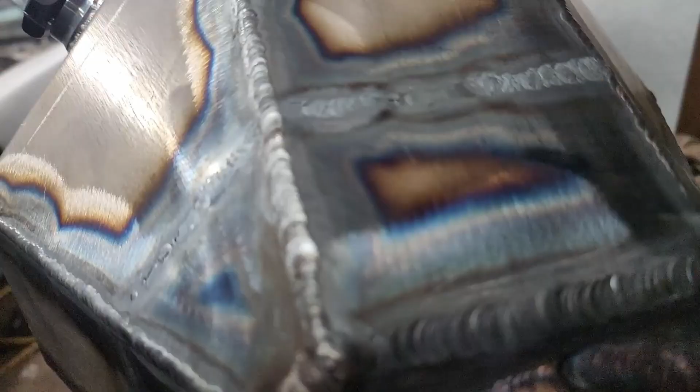Today's plan is to get the chassis ready for a mock-up block and transmission to get installed. The first step is to get all this front suspension off, figure out how to unbolt these motor mounts, put the LS swap motor mounts in, and then set a mock-up block and transmission in the chassis. Once we know where the tail shaft of the transmission is, we can start putting in some of the floor structure.

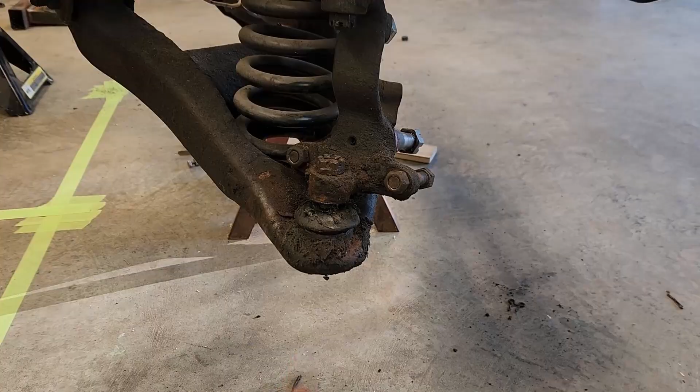We show you guys the back half install and how we got the body off the frame and all that good stuff. We're trying to get the spindles out, and it turns out when you don't have the weight of a car and a motor and everything on the frame, you can't compress the spring real good. We tried pumping it up with the jack and it just started picking the chassis up and didn't compress the spring, so we needed to add some more weight to the front of the chassis.

Oh yeah, now it's tight. Good enough. So we can just carefully take one of these off. There we go. Perfect. Well, we got the whole front of the frame stripped down.

We're actually gonna pick the whole frame up, carry it right outside, and power wash the whole thing. Figured might as well have a nice clean frame before I start bolting new parts on.

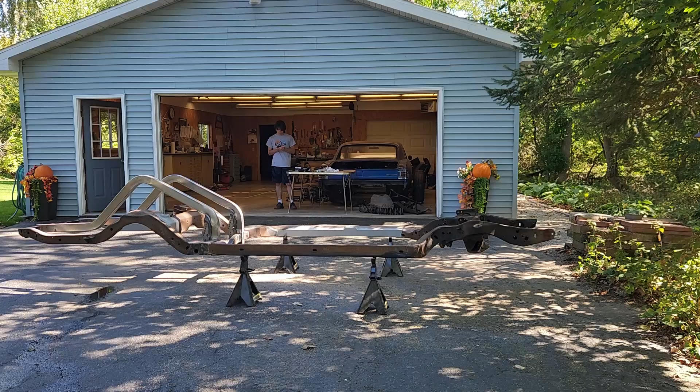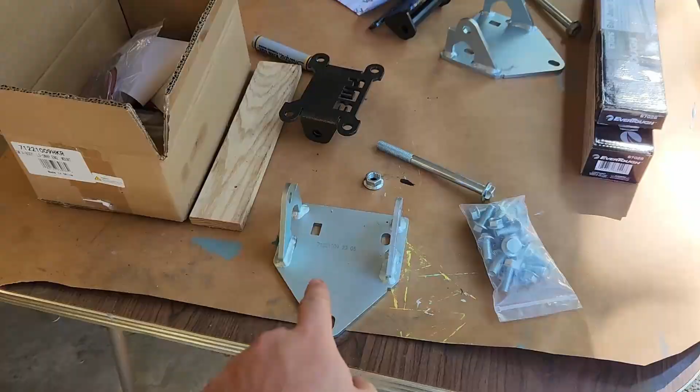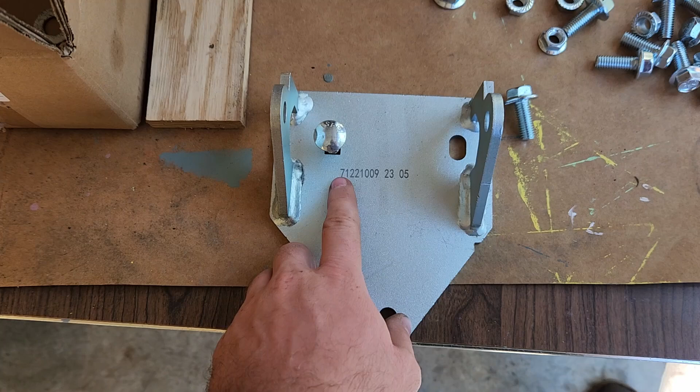So the engine stands, or the chassis side motor mount brackets, are Hooker Blackheart LS swap motor mounts. These are the ones that say they put the LS engine in the factory small block Chevy location. For anyone who's wondering, this here is the part number for these. Basically the bell housing mounting surface stays in the same spot as long as you use a factory LS motor mount.

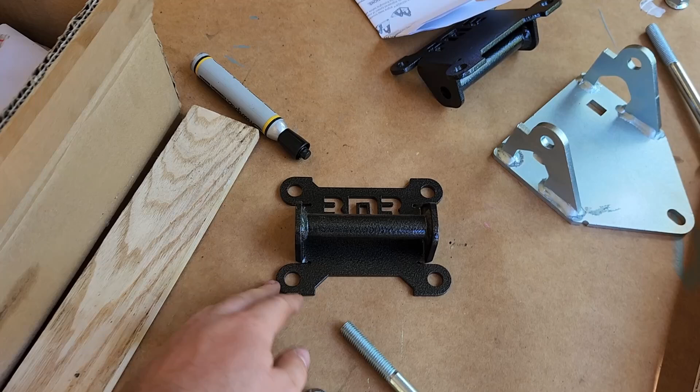So what I have for the motor mounts are solid BMR F-body motor mounts. The instructions for these say to use an OEM or equivalent 4th gen F-body engine mount, which is basically what we have right here. This is basically going to just be a race car, so I figured I'll go with the solid mounts.

All right everybody, we're picking right back up where we left off with the Chevelle. It's been a couple weekends since we've been here working on it. What we're gonna be doing right now is going to pick up some steel tubing for the roll cage. I got an order placed, hopefully I got enough. I got a little bit extra because I'm figuring we're gonna screw something up at least once, so got a couple extra feet, or 10 or 20. We're gonna go pick that up right now, see if we can show you guys any of that process, and we'll come back here with the steel and start getting some tubes bent up and put in the chassis.

We just parking under the big crane or what? Oh man, does it go down to the last bay, so I'm assuming it means the last crane here. Probably. This is pretty cool. This is really cool. They got steel everywhere. Holy cow, that's a lot. Do not leave dunnage. I don't know what that means. I don't know what a dunnage is. Yeah, this is sick, this is sick.

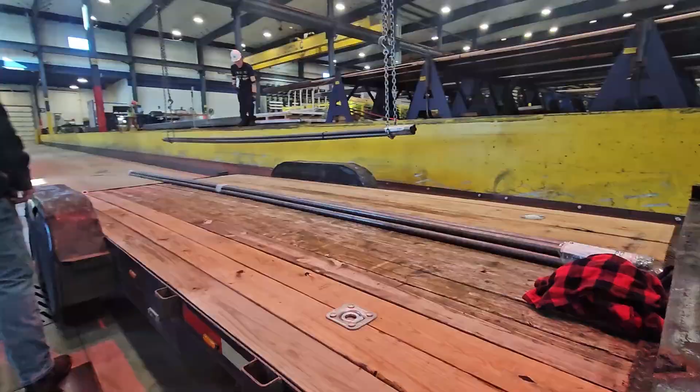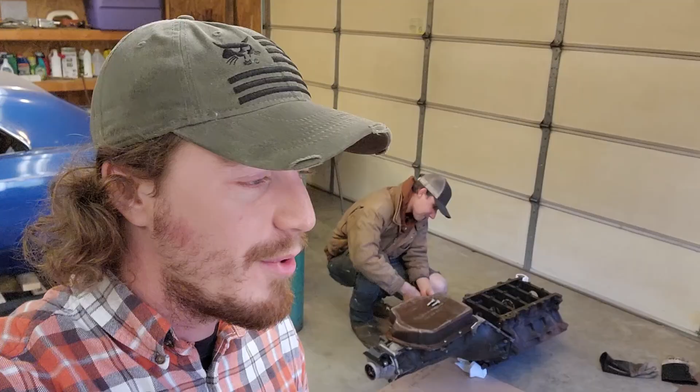Alright guys, we are back from picking up roll cage tubing. We got the floor off the frame. We're bolting in, that's actually a 5.3 block that we're just using for mock-up. That's the Turbo 400 case, got all the guts out of it. We're just gonna pick it up, set it in the frame, put the floor back over top of it, and then we have all of our obstacles, I guess, in the way, and we can start building the floor structure around everything.

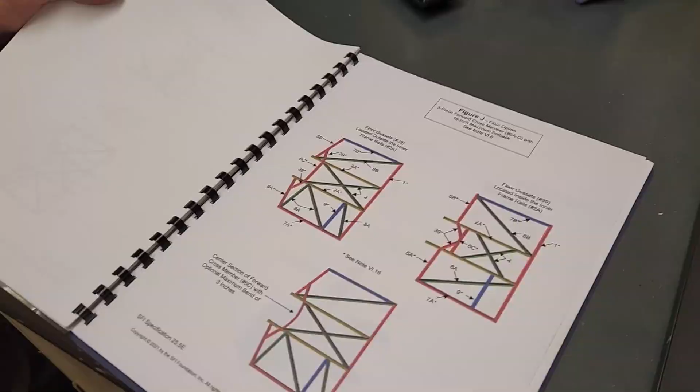So here we have our SFI spec book 25.5, and we're trying to figure out what bars we need for the floor. Really all we need is our number 2 inner frame rails, which is these 2 yellow ones here. We need the 6A, 6C, and 6B, and that's pretty much it.

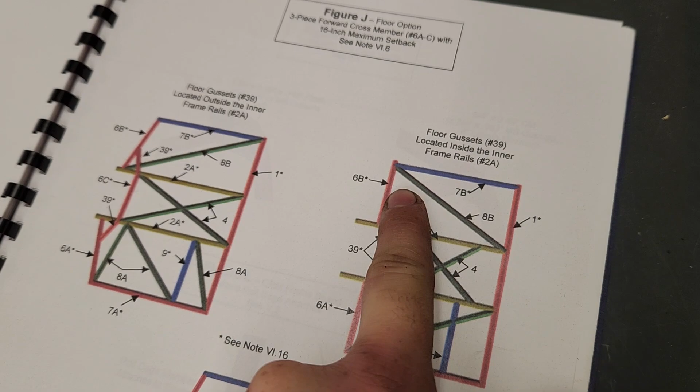We probably are going to need to do something similar to this, where we'll set the transmission cross member, or the 6C bar, back. Number 6 bar should be right about here, and that's going to run into the transmission, so we'll have to step that back to pick up the back of the transmission there, and then come forward again.

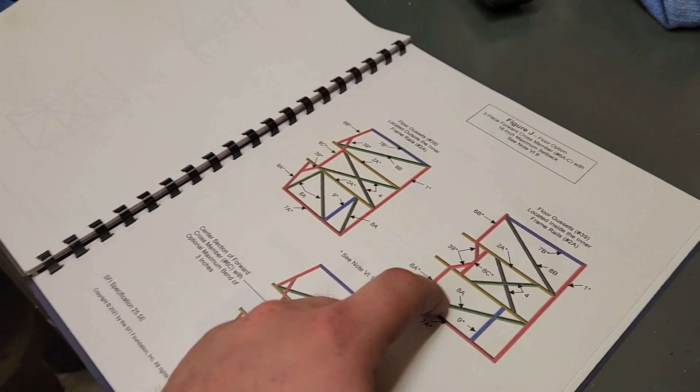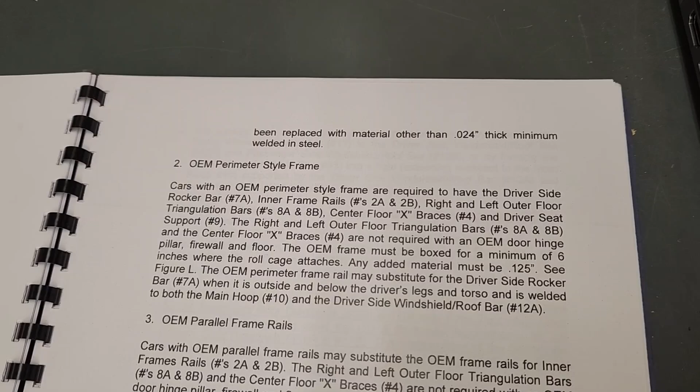Then we're probably going to need to put these gussets, although something in the rules said if you have factory stuff you might not need the gussets. If you read the rule in this part here, it says that you don't need the 8A, 8B, or number 4. So that's kind of what we're looking at right here. We don't need this diagonal, this X in the middle, or that diagonal. And then these are just other pictures of how you can do it.

Basically, all the pictures in this book that they show you are kind of recommendations or ideas on how you can do it. They're more guidelines rather than rules. The code is more what you'd call guidelines than actual rules. You need to have the book to read all the words, because that's where the real rules are and that's what really matters.

All right, so we finally got to bending some tubes. You can actually see here we got one bent already. Now that I think we got this sort of figured out, maybe, I'm going to try and show you guys bending this other tube here. You basically just got to do the exact same thing.

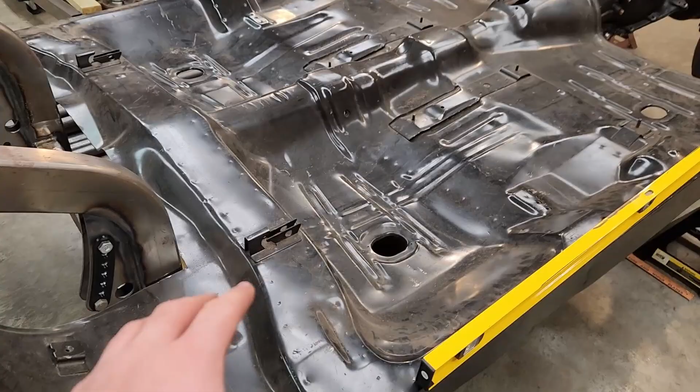And what this tube is for, this is going to be our inner frame rail. So it's going to run underneath the floor here, well, it's going to be a number 2B, and it's going to come underneath the floor here, and then weld on basically right underneath this hole here. So that's our plan.

With these two tubes right here, we got to do one for each side, so that's why we're doing two of them. I'm going to stuff this in the bender and show you guys a little video of how this bender works.

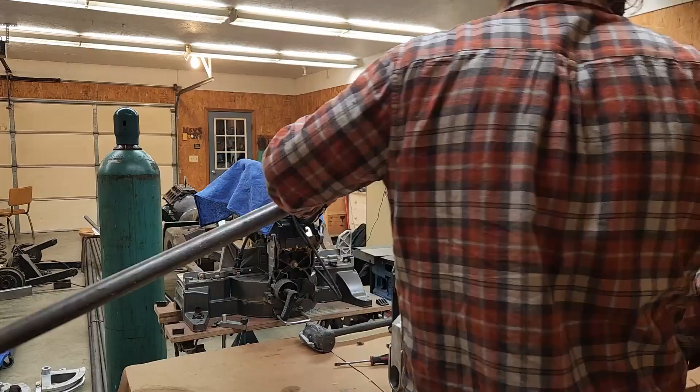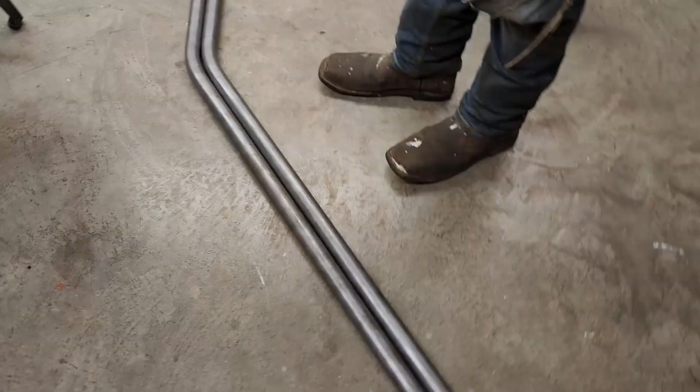Alright, let's see how we did. Darn near perfect, it's very close. I got this end pulled tight. That's good enough for this. Once we get those both fitted up, then we'll tack them in place and start working on the 6A and B bar, I think.

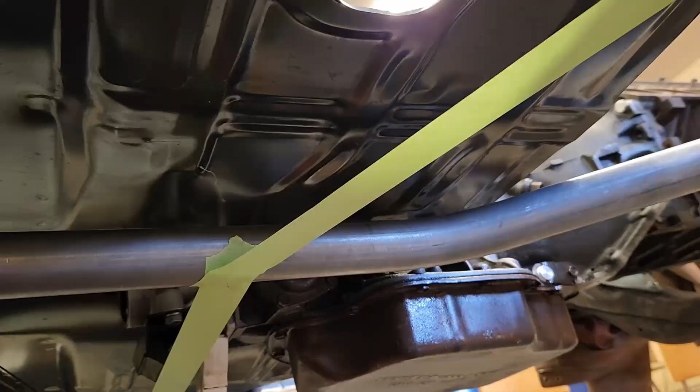Alright everybody, I'm laying underneath the car right now. We got both of our number 2 bars tacked in, and we're starting to lay some tape and mock up where we want our 6A, B, and C bars to go.

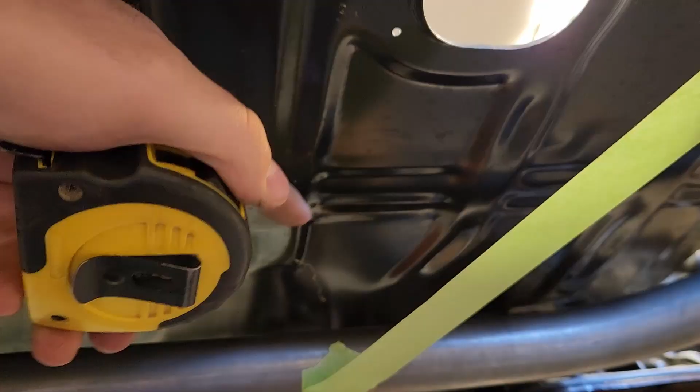Putting the tape up is a pretty good way to get an idea of where you want your bars to go. You can get your angles in here, like you need to figure out what angle to cope this bar at to this bar. Set your tape up and then measure the angle between the bar and the tape. You can also take a tape measure and measure the length of the tape you have, add a little bit extra, and that gives you a pretty good idea of how long of a chunk of tube you need to cut and what the angles are.

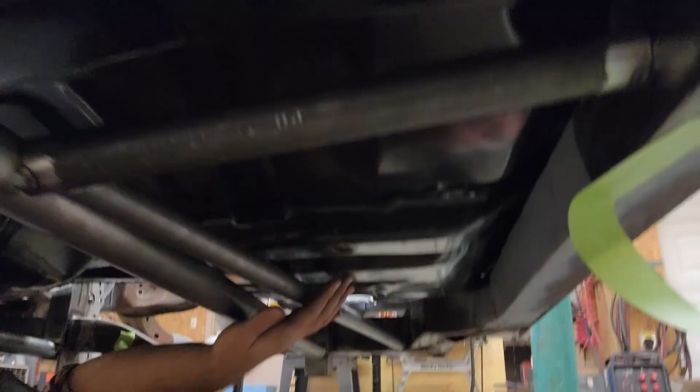Alright guys, we're both laying underneath the car here, working on getting this diagonal put in right here. The rules say that we don't need this diagonal if we weld our number 2 bars to the factory floor, and we didn't want to try and mess around with welding to the floor, so we're putting these diagonal bars in, and it's going to tie into our seat bar right here. This is like where your crotch strap would go.

Okay, so I think we got most of the math done on where we need to cut these axle tubes at for the rear end. The jig that I got for doing this comes with a centering plate. You have to have one of these if you're wanting to do this from scratch, or really if you want to do it at all.

You line it up with the right holes here. So I've got it in the F hole for Ford. This is your slot for where the pinion center line is going to be, and the arrow points, so it's on that side of the slot there. So basically you want to figure out where your tires are going to be.

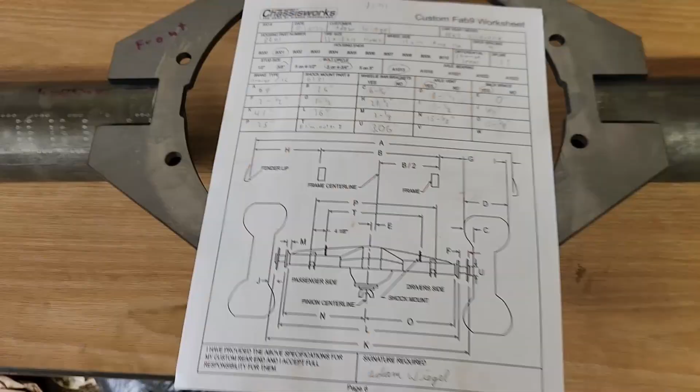I wound up downloading this worksheet from Chris Alston Chassis Works. These are the guys that I got the back half kit from. This is pretty helpful. It gives you all the dimensions you need to know for doing this.

What we're figuring out right now is this N and O dimension. Found that dimension to be 15 and 5/8, and then I just measured from this line 15 and 5/8 in each direction, and then I actually measured how much that actually needs to be on each axle tube.

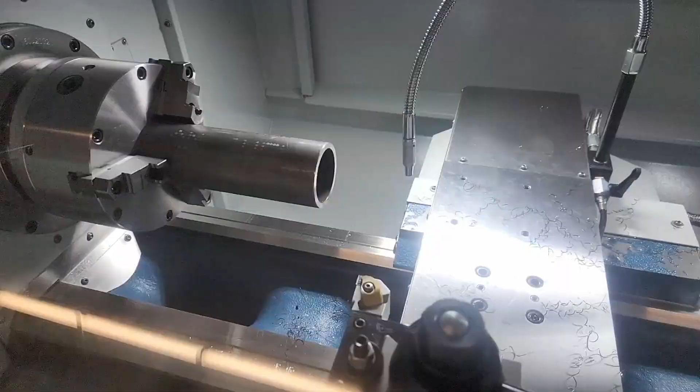On a Ford 9-inch, the driver's side axle tube is going to be shorter if your pinion is centered. So the driver's side one is 8 3/4, and this one's 11 3/4. What I'm going to do next is take these axle tubes to work and face them off at length in a lathe so the ends of each are perfectly straight.

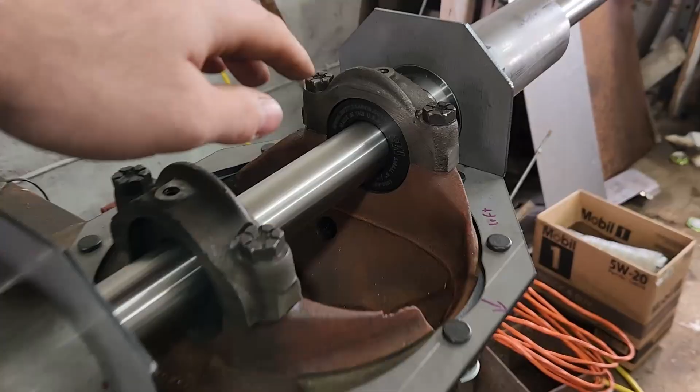We're starting to mock the rear end housing up in the jig. We got a center section and we got the face plate bolted to that. I got the centering pucks put in where the main caps go on and ran the bar all the way through. So now I'm just going to double check all the measurements, make sure it actually is the right width, and everything else checks out.

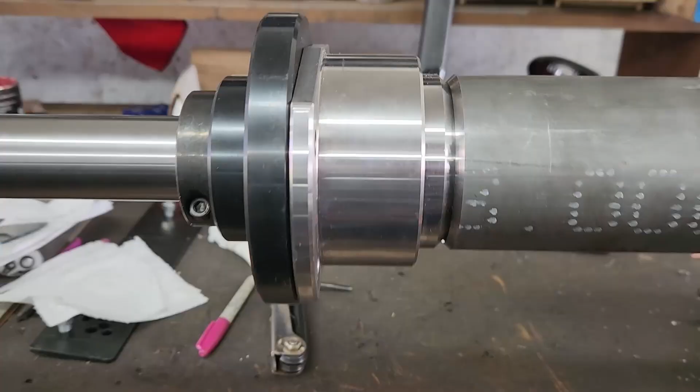I put the housing ends on, and then I also got a tape measure here. I'll butt it up against the puck on that end, and this should be 36 inches, which it is. So my overall rear end width that I want from axle flange to axle flange is 41 inches. On this particular rear end, each axle has a 2.5 inch offset, so it'll be 5 inches longer in reality, so that 36 inches is perfect. That's exactly what we were looking for.

So you can see we got the main part of the rear end housing all welded up here. Now we got to weld the back brace on. We need to build a preload jig to make sure that the thing doesn't turn into a Pringle chip when we weld the back brace on. We already know it's kind of doing that a little bit.

All right, everybody, we got all of the floor structure in the middle of the car at least tacked in place. Peter's going to be working on that. And what I'm going to be working on is trying to get the rear end housing straight. So you can see the rear end housing right there behind me.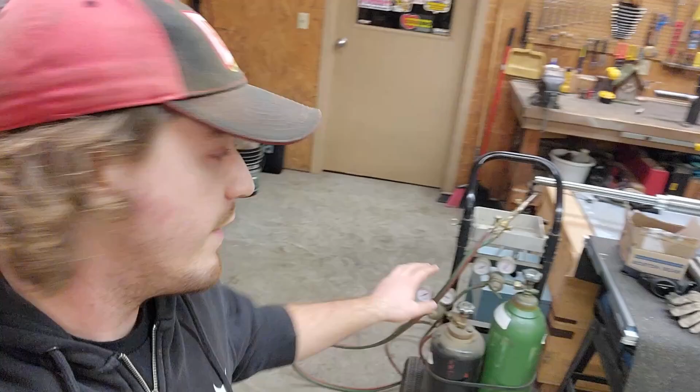And then I've got my uncle's oxyacetylene torch. What we're going to be trying to do is heat up the axle tubes and get everything to straighten back out. It's not quite straight. This puck should actually just slide right in there. And this side's actually getting pretty good.

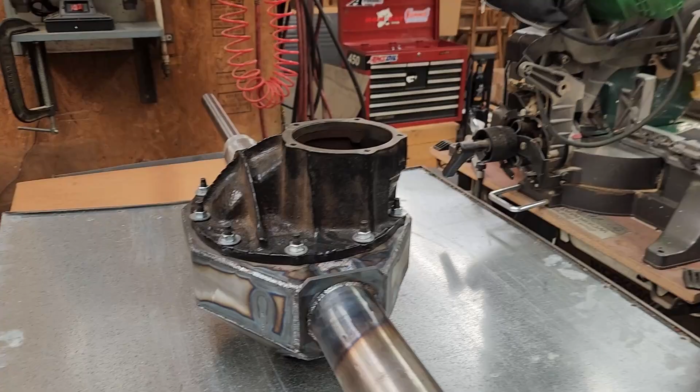You can see that I've been working on it a little bit. This side, I haven't touched at all yet. And you can see the gap that's in there. When you heat it up, it's actually gonna make it a little bit worse because as the metal gets hot, it's gonna expand a little bit. But when it cools off, it's gonna contract more than it expands. Very similar principle to weld draw. And you're basically inducing artificial weld draw.

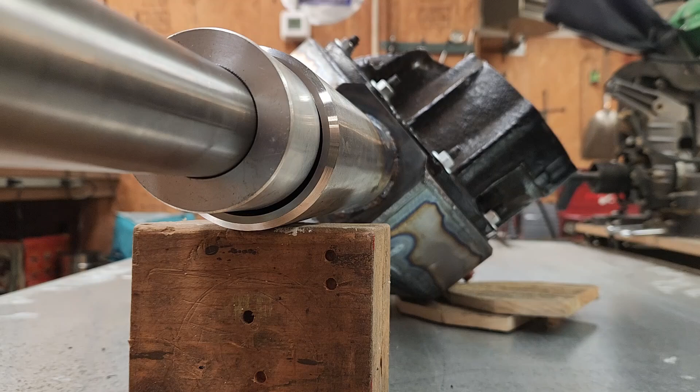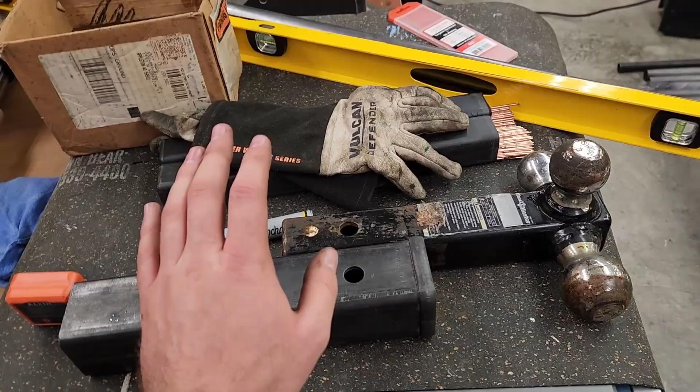So I went to Fleet Farm and picked up this 2-inch hitch receiver. I was looking for 1 1/4 inch because a 2-inch is probably overkill, but this is all they had, so I guess this is what I'm gonna use. That's probably all right, bigger is better. And I do plan on pulling a trailer with this if I ever do some drag and drive stuff, or I at least want the option available.

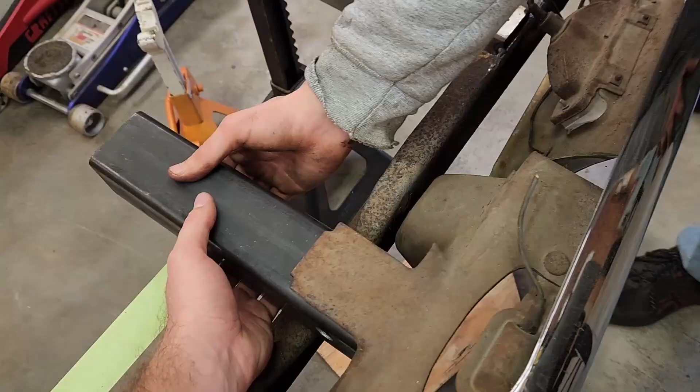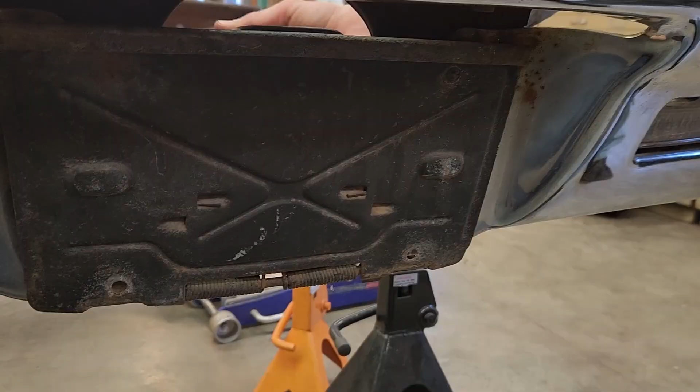So I'm gonna put a mark here, go a little bit past this because I'm actually gonna weld a bar through here, cut a hole in here, put a bar through it. So if the hitch sits in there like that, I can reach up underneath through here to put the pin in, and then the hitch hides behind the license plate. I want to be able to completely hide the hitch behind the license plate back there if I ever want to run the car without a hitch on it or without the parachute on it.

The other reason for having the hitch up higher in the bumper instead of mounting it completely below the bumper is that you want the parachute pull point to be more in line with the center of gravity of the car. If the parachute's mounted too low, two things will happen: the parachute will drag on the ground in the shutdown, and it'll actually pick the back of the car up when it blossoms, because it has leverage on the bottom of the car. General rule of thumb, the center of gravity of your car is roughly at camshaft height.

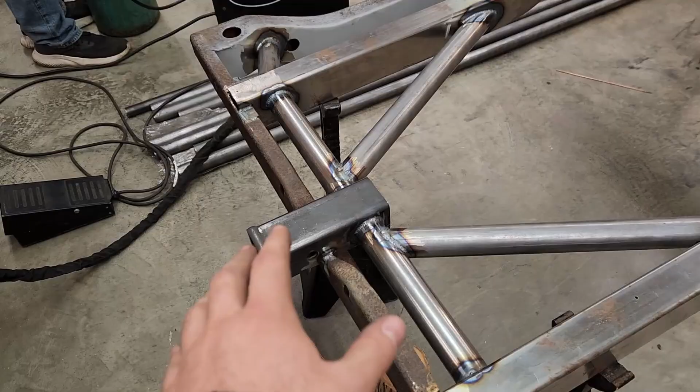So there's our 2-inch hitch receiver. We got it welded to this bar primarily that actually goes all the way through the hitch. That should absolutely not go anywhere. And then we also have these bars triangulating to that bar. That should be a very sturdy place for the parachute.

All right everybody, we are about to do something I've been waiting to do for a very long time. I'm pretty sure we finally have enough structure in the back half that we can successfully cut away the factory frame and not worry about anything shifting.

The frame is pretty much done. I don't know what to say. I don't really know what to do with my hands. Be good just to hold them down by your side. Yeah, great. But the frame is done.

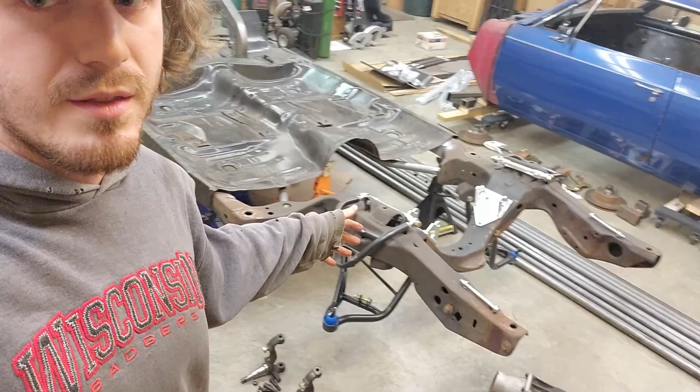I think now we need to start getting the rear end kind of mocked up underneath here, and I need to design some four-link brackets. Then we can roll the chassis back underneath the car and start working on the rest of the roll cage. So what I'm going to be working on tonight is putting the spindles on these new control arms.

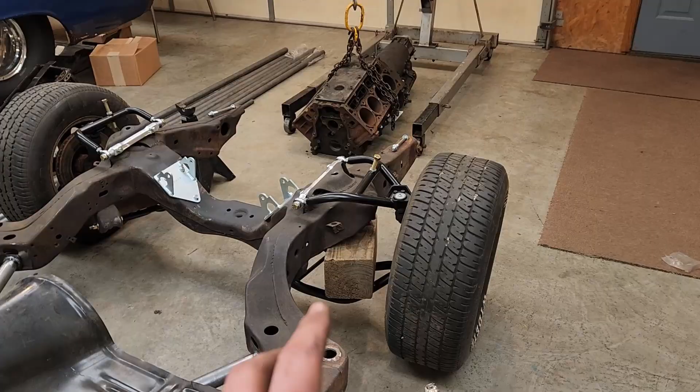Just enough so that we can put some front tires on this, and then I'm basically planning on picking the whole frame up like a wheelbarrow, rolling it outside, spinning it around, and then coming back underneath the body with it. Another thing with these TRZ control arms that I figured I'd mention, just in case it helps anybody else out, is which one goes on which side.

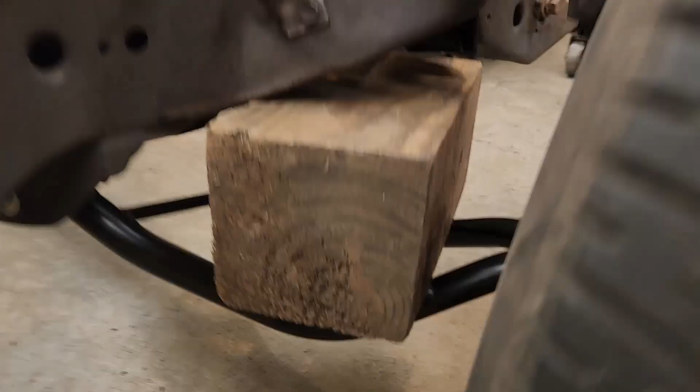I found a forum that said this limiter bolt should be biased towards the front. On the bottom, there's this brace that's on one side you can kind of see, so you want that brace biased towards the back. That's how you set up control arms, at least on a first gen GM A body. It should be the same for 64 to 67, probably 64 to 72, but just thought I'd throw this in here in case it helps any of you guys out.

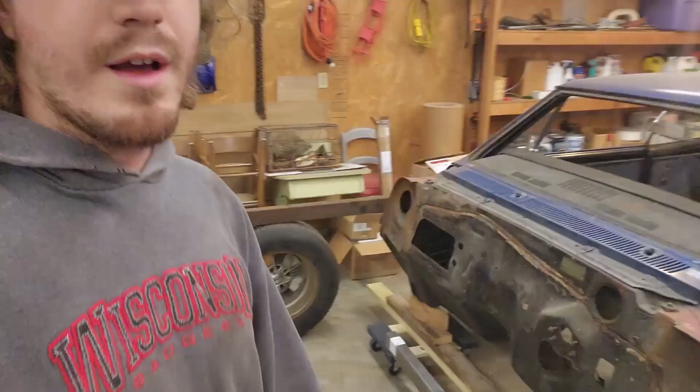My Uncle Jim's coming over with his forklift, and we'll hopefully be able to put the cherry picker on the front end here and the forklift in the back and be able to pick this up somehow, and then somehow we'll get the frame situated underneath.

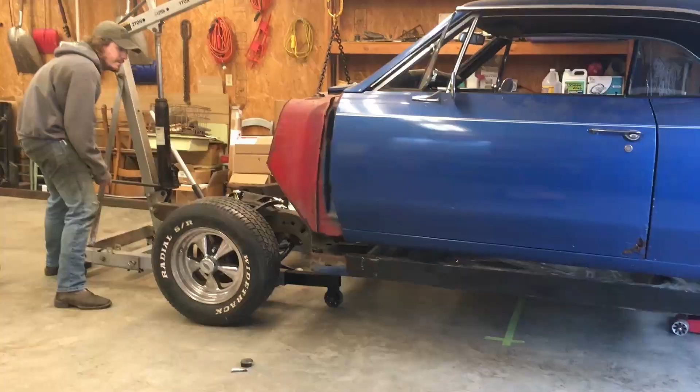Well guys, unfortunately my battery died on my phone in the middle of that time lapse, so you guys didn't get to see the body come down on the frame. I think my grandma took some videos of that, so I probably threw those in after the time lapse. Hopefully you guys are able to see some of that. But anyways, behind me here we have the body down on the frame. So huge thank you to my uncle and my grandpa for helping me set this up.

We can now start getting the rest of the roll cage fitted inside the body, and we can start playing with some of the suspension geometry back here, get that situated the way we want it. We can start getting wheel tubs fitted in here, get some of the tin work done in the back. We can work on some of the stuff in the front and get the steering column put in. Some of that stuff we might not do because we are probably going to end up pulling the body back off again to finish welding everything.